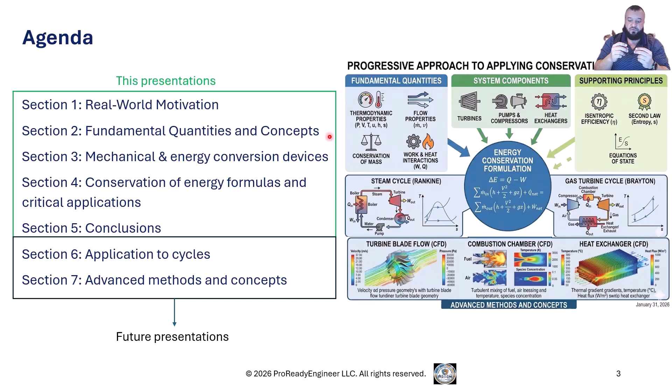So what is it that we are going to be discussing today? Let's grab a pointer. The way we are going to do this is we'll start with what you know, and what motivates us. Why would we want to study the conservation of energy? We move on to bolts and nuts. Any topic you break down to the bolts and nuts, you see, how many human beings, if you give them a bolt and a nut, wouldn't be able to spin the nut on the bolt? I think very few.

So if you start from the bolts and the nuts and you assemble all the way up, by the time you reach this big assembly, it's common sense. It's simple, easy to understand and comprehend. So that's exactly the flow. We'll start with some fundamental quantities, properties, things of this nature. Then we move to introduce mechanical devices that are used for energy conversion. And we are building toward this section 4. Section 4 is typically where you start learning this topic in regular teaching styles.

I don't believe it's an effective way. I think this way is truly very effective, that I am teaching you about the topic. So by the time we write down the formulas, it will feel to you as if these formulas are something you've known forever. They are very easy, very simple to write down. Then we will give some conclusions.

And as I always say, I'm going to take you from zero to hero, from the very first principles of how we think about conservation of energy. And down here, I'm going to take you to CFD analysis, what kind of different CFD exists, why we use them, how we use them, what's the value, what's the assumptions. I cannot do all that; I need many hours. So what I'll do is I'll cover this today, and then we'll go to the next level in either one or two videos that will come really soon, if you will.

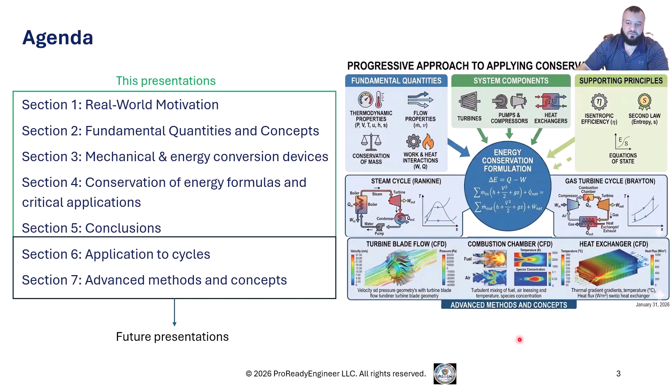To set you up for success, you see, conservation of energy is a concept that you come across in your day-to-day life, and you either notice that or you don't know that. So let me tell you. See the fan that sits on your desk. What is this fan doing when you turn it on? What exactly happens? You say, it blows air on me. That is conservation of energy. How is that? Well, you see that rotating element that rotates. It took this rotating mechanical motion and transferred it to fluid motion.

Your water heater. What does your water heater do? Burns natural gas. You know there's a natural gas connection. Many of you went probably in your basement. You've seen the little flames there. And it takes this natural gas and takes that energy and heats up your water. That's conservation of energy. Your air condition, your fridge, your car engine. Car engine, you put fuel and you get your wheels rotating and you travel. Mechanical motion from fuel energy, conservation of energy.

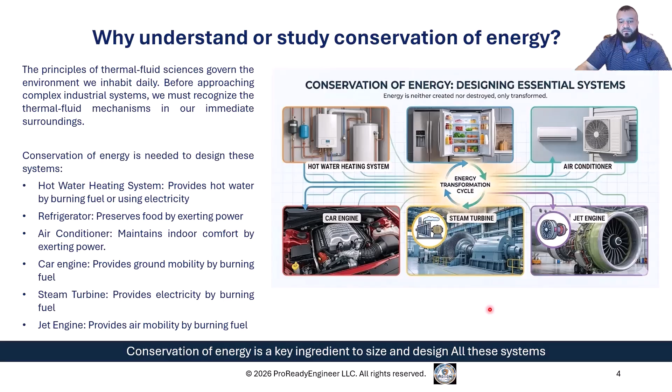The jet engine, when you fly, that device on the wing that powers the plane. Principle of conservation of energy. Steam turbines that generate electricity. If you've never heard about them, these are very important units that generate electricity. We're going to talk about them in this presentation. And on and on and on. So either you notice that this conservation of energy, where the energy is changing from one form to the other, or where it's changing from something to something else to function in a certain way, to deliver a target. This is all governed by the conservation of energy. So it's a key ingredient. We need to know it well.

We are going to get on it, starting by the very basic bolts and nuts. We're going to talk a little bit about conservation, concept, properties, heat transfer, fluid flow, work, closed and open systems. So let's do that. In every section, I'm going to follow the same strategy, if you will. I give you the name of the section and the ingredients or the components of that section, if you will.

I'm going to strongly advise you to go back to my video about properties. Watch it first. I have like a slide here, but I think the video is like an hour and a half or something, talking about the properties, how to feel them, how to measure them. I got a tremendous amount of positive feedback from people who have seen the video, so thank you for that. Always remember when you watch my materials that I am actually following a sequence. It's not haphazard. I publish something and I build on that and I kind of keep doing that.

So very quickly, a refresher about thermodynamic and flow properties. U is internal energy. Think of it as the energy of the molecules. It's something that's a very strong function of the temperature.

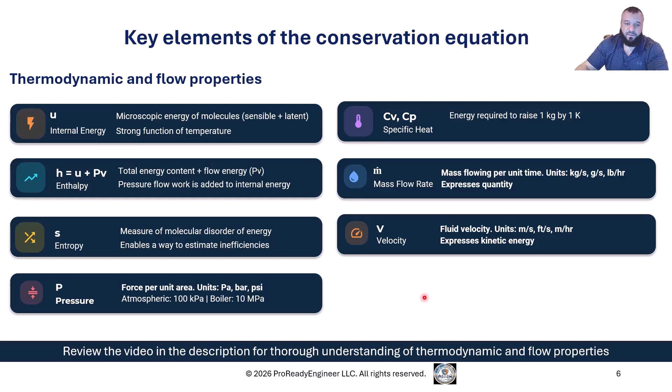Pressure, force per unit area. CV and CP, specific heat: the energy required to increase the temperature by 1 degree. Mass flow rate, the amount of mass flowing per unit time of the fluid you are working with, and v is the velocity. I'm going to put the link in the description for you to learn more about these properties. In the other video, I discussed these concepts on the screen, so let's get on it.

Before I talk to you about conservation of energy, if I'm going to teach you about conserving something, you better know first what is the something. Enthalpy is one of that something. It's the energy of the flowing fluid. We discussed that. Now add to it potential energy. Potential energy, you've taken it in your high school courses, where they told you MGH, right? There's a datum, you go from the datum. They told you when you are standing there, the potential energy you have is MGH.

So where is the mass here? Why didn't you put mass, M or M dot or mass flow, something of this nature? Because this is just a specific energy form. What do you mean specific energy? Well, that's in joule per kilogram, energy per unit mass. We many times like and use both flavors. The flavor where we say, here is the energy per unit mass. And then when you say, no, here's actually the total energy, you multiply that by the mass. So the units of that is joule per kilogram, kilojoule per kilogram, BTU per pound, energy per unit mass, and this reduces to feet squared per second squared, meter squared per second squared, and on and on.

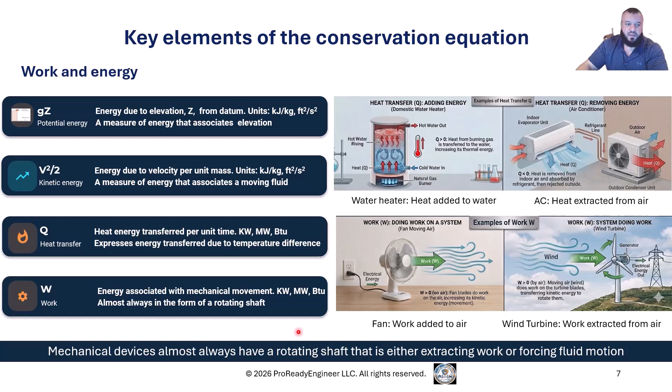We discussed open system versus a closed system. To the most part, everything is an open system. Whenever I say something and I say, well, this is what it is, this is what it means, the 90% of life is what it means, just so you now know more about me. Open systems, what do you mean by open system? Very simple. What is a system? A system is that thing you are interested in, you are solving. If we are analyzing your fan, then your fan is our system. That's it. If we are analyzing your water pump, that's our system. A turbine, that is our system. Your boiler, it's our system.

That's a system. Open system means there's a mass flowing in and a mass flowing out, or just in or out. There is mass flow. That's an open system. So when I say that, the first thing that comes to your mind, well, almost everything is, very few applications are where no mass goes in and out. So then we shouldn't have closed systems? No, there are closed systems. What happens in a closed system is there's no mass transfer. Mass doesn't come in, mass doesn't go out.

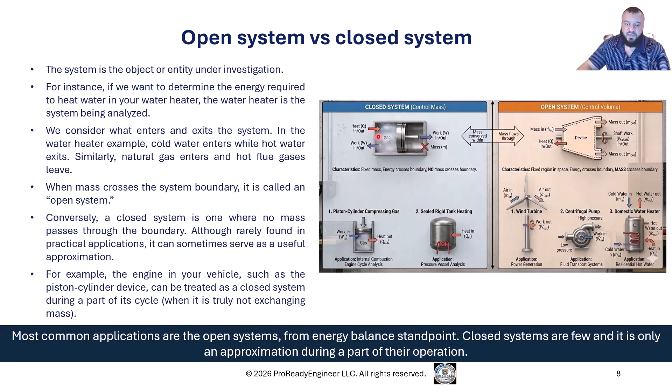Why are we dividing the systems into open and closed? Because our analysis will be a little bit different, by the way. That's it, that's all, just a little bit different. Good. And I have some depictions here. Open system, open system, open system, stuff coming in and out. And a cylinder here with no mass transfer is a closed system. Good.

So what is conservation? Conservation is a common sense principle. All engineering, remember, engineering is an applied science. It's using science to do things that are useful to our lives. This is engineering. And it all makes perfect sense. Engineers, in my opinion, I would recommend every single human being on earth to study engineering. One way or the other, even just a portion of engineering, even if you get another degree, even if you are a medical doctor. Engineering is amazing in making your thinking structured and geared toward targets and efficiency and economy. It makes you think of multiple things at the same time, very well organized at what you do, and it benefits all aspects of your life.

Conservation is a concept that you know by heart. You say, earlier in the week, I had $1,000. And now it's Sunday, and I have 350. So what happened? Well, I spent 650. There's nothing else to say. Likewise, when we do the conservation of mass, and energy will follow, the mass going into a system is the mass coming out plus the mass that was stored. No one can object to this equation. And you can never forget it. Like I tell it to you now, and until the day you die, you cannot forget it. Because how would you forget it? God forbid you lose your brain or something. What comes in has to be what comes out, plus what was stored.

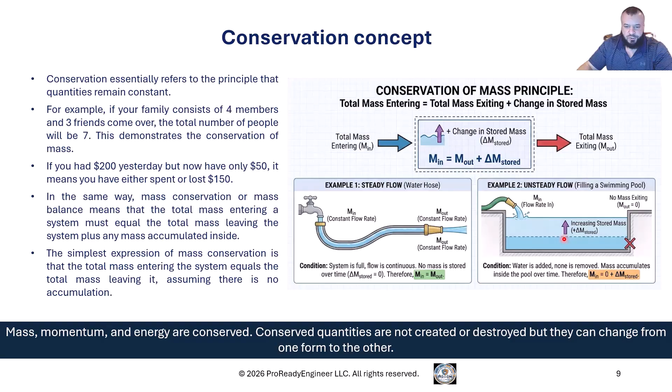Now, if we talk about filling your pool, that's a little bit different. Your system in this case, what you are analyzing, what you are designing, is your pool. You are filling it. That's my pool, that's my system. Okay, what's happening to your system? You say, mass is coming in, your hose is on, you're filling it. No mass out, and the mass is all stored. The mass in is what is stored in the system. So you cannot go to analyze this and say, well, there's no stored mass. The whole thing is stored mass. Good. So conservation is actually very simple.

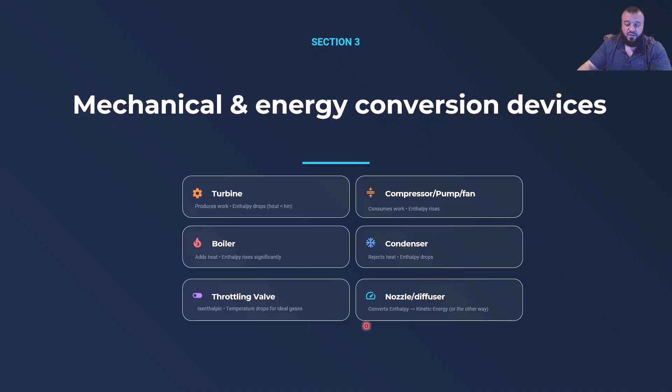So now let's move on. Before talking to you about conservation of energy, I've given you all the bolts and nuts we need for now. I'm going to introduce you to mechanical devices. We need that before we move forward. What are the mechanical and energy conversion devices I want to share with you about? We have the turbines family. We have the compressors, pumps, and fan family. We have the boilers, heaters family. We have the condensers, radiators family. We have the throttling valves. We have the nozzles and diffusers. These are devices that exist in everything around you. Let's see what they are and what they do.

Turbines. These are mechanical devices that harness energy from energized fluids. If you have a fluid that has energy, you put in a turbine and you extract that energy. What do you mean, extract the energy? You put in that turbine and you get that spinning shaft we are talking about. Once you have a spinning shaft, the turbine is spinning that shaft for you. You can do a tremendous thing with this.

You have seen water turbines before. I've seen a lot of ads on Facebook and YouTube of units being sold now. They go to a river, they have this set of blades, they put it in the river and the river is flowing, so it's spinning. It's connected to a little generator, and then they have generated power. It's a water turbine, but a micro turbine, a very small turbine. But that's the whole concept of turbines. It takes the energy of the flowing river, which by itself is not very useful to you, and suddenly makes it something very useful: that spinning shaft connected to a generator in this case.

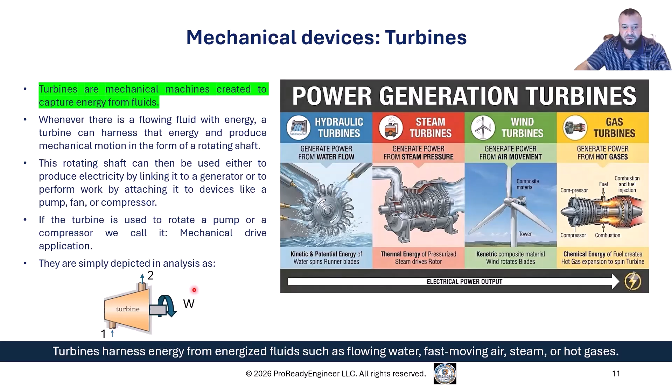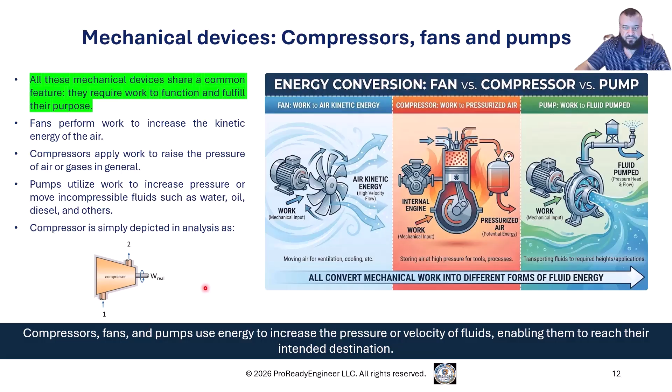And in the turbomachinery material that I will present, I may touch a little bit on the different types of hydraulic turbines, Pelton wheels, Francis, Kaplan, and then you'll know a little bit more about that concept of specific speed and things of this nature. Good. Little bit more on the devices.

So boilers or heaters, what they do, there's no work. In your basement with your boiler, no shaft spinning, none of that. You burn fuel, you heat the water up. That's it, Q. It's just Q. Take the energy of the fuel, change it to a thermal energy. We heat something up.

Condenser and radiator is the opposite of that. It's when you want to remove heat, right? Think about your AC. It's removing heat from your home, then a condenser is involved. There's some sort of heat exchanger that cools things down. Well, it's more called an evaporator, but that's beyond what I want to say today. But it's that device that is pulling air from your home, moving a Q.

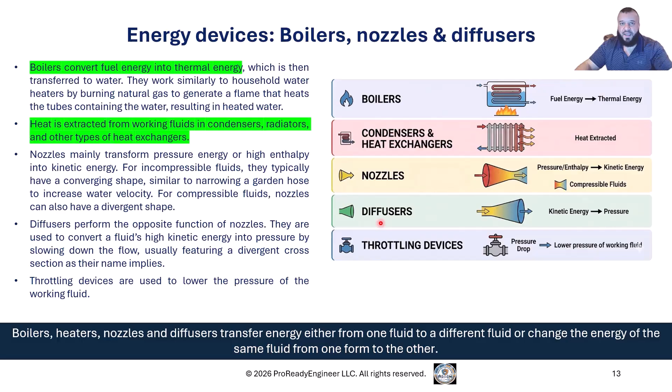And the way you will know it's changing to pressure or enthalpy is when we write down the energy formulation. So bear with me for a second. But what you know right now is the nozzle brings the velocity up, diffuser brings the velocity down. And in a second it will make sense to you why, when this happens, the opposite happens to your pressure or enthalpy. Good.

Now we are ready to write down the energy equation in a simple form. And once we put the simple form, immediately we put it to application on a very simple example. Then we top it up a notch and we go to detailed system level analysis with the energy conservation. And then we top it up a notch to advanced analysis that you will actually see and use in the industry. And you will get subjected to some of that in your early career as an engineering student. Good.

Now writing down the energy equation is going to be very simple. If I ask you, after what we have done so far for 1 hour, when a fluid is moving, what are the energies associated with that moving fluid? You will say there are three things: enthalpy, kinetic energy, potential energy. If a fluid is moving and I want to quantify everything it has, nothing else it can have, it will be enthalpy, kinetic energy, potential energy. h, V squared over 2, gz. Where is the mass? Where is the m dot? Why aren't you multiplying? That's the specific energy form. Kilojoule per kilogram for each. That's it. Nothing else to put in. That's all the forms of energy that we can put in.

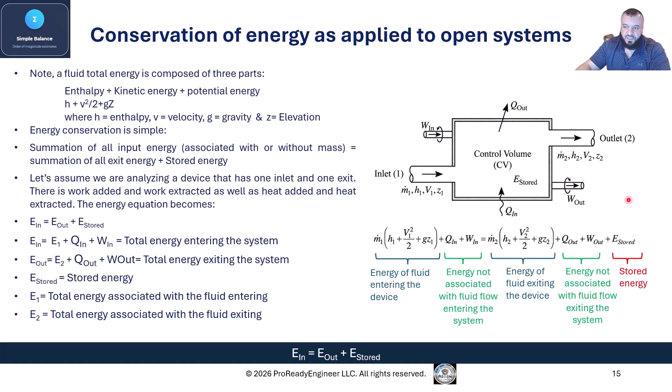And immediately we put this to work, meaning we use it. Let's go and see how this will relate to what you learned on the first law of thermodynamics. So it turns out that the first law of thermodynamics is a simplified form of the energy equation that we've written. How is that? Let me show you.

Assume it's steady state. There's no stored energy. Assume no work is coming in. Assume no Q is coming out. Assume that the potential energy change is about 0. There's not much difference in the potential energy, and there's not much difference in the kinetic energy. All these terms can disappear from the equation on the previous page. Plug everything in. You end up with Q minus work equals m dot times delta H, H2 minus H1.

And this is the formula right there. Q minus work equals delta H. That's the first law of thermodynamics. Does it make sense? For now, I think it makes tremendous amount of sense for you. The reason there's a difference between Q and work is actually manifested in the difference in the enthalpy. That's it.

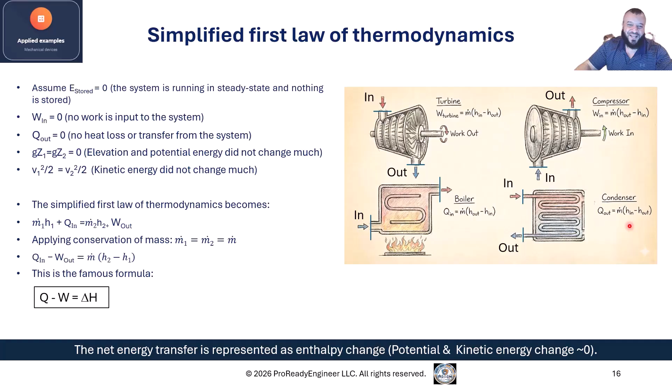Draw the schematic and say: here's the flow coming in, here's the flow coming out. Put everything together and solve. If the work is positive, your assumption is right - the device is using work. But if your assumption is wrong, the sign will be negative. When you finish your math, it says negative 100 kilowatts, that means it's actually generating work. Very highly unlikely you'll get that to analyze, but just in case. So it's very simple, very simple.

Now let's move to the pumps. Why treat the pump differently? Well, you'll know in a second that the fact that it is incompressible gives us a simplification to the example, and it'll make things a little bit different in a good way.

So this is a pump. The pump needs work. There's something coming in - this is water coming in, and there's water coming out. When the water comes in with a certain m dot, it has h, it has velocity, it has kinetic energy and potential energy. We killed that.

M dot, h, v, z2. Let's write down the energy equation, the generic one. There's no Q out, there's no Q in, there's no work out, it's only work in. Furthermore, we can neglect the potential energy, we can neglect the velocity difference, assuming that V1 and V2 are the same. That's an assumption - it may not be, by the way, it may not be.

The potential energy difference makes perfect sense to ignore for the pump. You know this pump, if I have it here on the table, like this big, a very large pump, and you look at the difference between the immediate inlet to the pump and the immediate exit of the pump - you say, well, these are very close. I mean, potential energy of what? Compared to this order of magnitude, this thing is moving a tremendous amount of energy, so many horsepower. It's like saying you have $10 million and 2.5 cents - that doesn't make any sense. You don't do that. You have that feel for the money; please use the same feel for the energy. You say it just doesn't make sense, don't even talk about it. Good. So potential goes away.

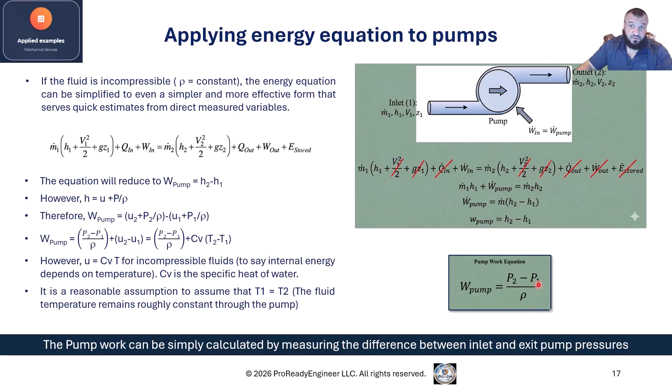Enthalpy is not easily measured. It's not easy. It's not a direct measurement. You cannot do that. You cannot measure enthalpy online. So that's the goodness of making this simplification for the pump. It's something that we very easily measure accurately. Good.

Now, we are going to talk about applying the conservation of energy to a closed system. Very quickly, just one slide. Now, it's not going to be any different from what we said. Energy 1 equals energy 2 plus energy stored. Energy at state 1 is equal to the energy at state 2 plus what was stored in between. Put the terms. Now take a close look.

I'm not using m dot. I'm not using mass flow rate. There is no mass flow rate. It's just mass. It's not changing, not coming in, it's not coming out. And when I express the energy of the fluid, I'm not using H anymore. Why? There's no flow. You don't use H, you use U. Internal energy, a fraction of that is what you use.

Put it in. Q and work don't change. Here's the assumption of what's coming in and what's coming out. Do the magic like we've done before, same exact. Q minus work equals delta U. So instead of saying Q minus work is delta H for an open system, it's delta U for a closed system. All of it in one statement. You use U instead of H to analyze a closed system. Good.

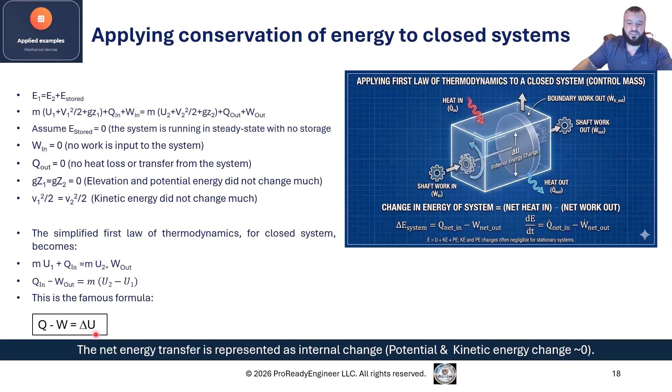I want to level up to some detailed analysis now, where we are incorporating losses. I want to teach you all about that. So imagine you have that pipe running from the pumping station by the river to your home. Many miles of pipe, or you are pumping crude oil from where it's extracted to a refinery somewhere, or you are pumping natural gas in a line that is running many miles. There is something important you need to know called frictional losses. Frictional losses are the losses because of friction at the wall of the pipe.

Now that pipe, it's made of, let's say, cast iron. Let's say it's made of steel. Let's say it's made of stainless steel. Let's say it's made of some sort of plastic. Let's say it's made of glass. Not that one, but this glass is what we use in a lab for visualization and stuff like that. But what I'm trying to say is, as the fluid is running in there, it interacts with the surface. When it interacts with the surface, this friction will reduce the enthalpy or reduce the pressure.

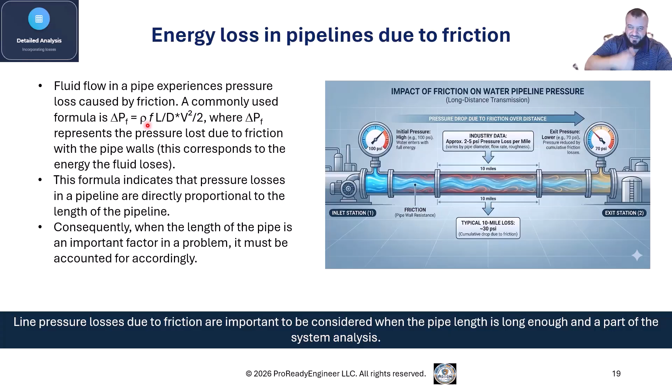Now the straw. What will happen if you try to put a small straw? You're going to keep sucking and you won't even be able to. Because of the frictional losses, the viscosity is extremely high, everything is sort of messed up, right? How can you put enough effort to overcome all this and be able to pull through? So the straw is very large, just like a finger, a finger large, and that makes it work. Now you can suck and pull that chocolate cake. Good.

Let's top it a notch. We are in the detailed analysis here. We're going to top it a notch. I'm giving you a system on the screen. Let's start with that. What is this system? It's a typical depiction of how pumping systems work. There's a pump sitting on the ground. That's our datum here. The word datum immediately tells you that we're going to be using potential energy, because datum, then potential energy relates to that datum.

So here's a datum. There's a tube sucking, like your straw. This is your straw. Sucking the fluid, in this case, let's say it's water, from down here where the water is. And let's say this is your skyscraper that you live in, very long, and the reason we have the pump is to suck that water from there and pump it all the way up. Let's say very long skyscraper. To a tank sitting on the roof. And then this tank sitting on the roof, so water comes out, dumps in the tank, fills that tank. Then that tank feeds the whole skyscraper. Tremendous amount of water. Let's say it's a very large one, 200 gallons a minute. Something really large.

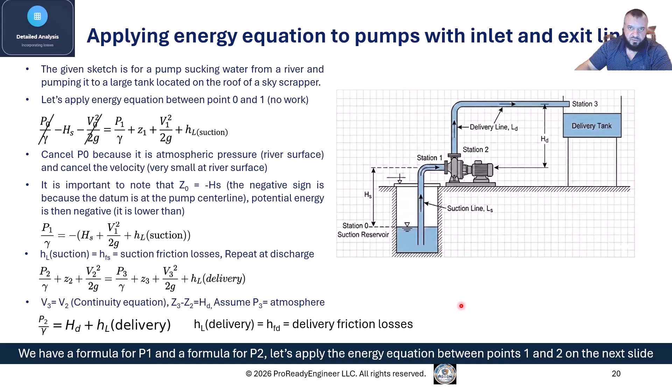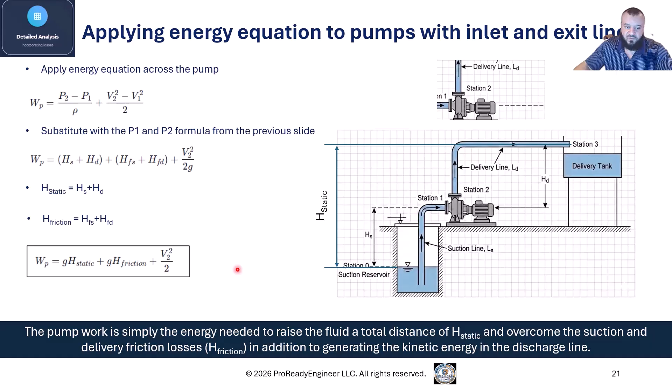And let's assume, as we have done a second ago, there's no power extraction, power addition, heat generation, none of that. Write down the energy equation now. And assume that this is incompressible. You remember what happens if we assume incompressible? You say H plus V1 squared over 2 plus GZ is equal to H, but H is U plus P over rho, but U is CV times T, but temperature didn't change, take that out. Now with pressure I can write it down instead of enthalpy as pressure. You arrive down here.

Bernoulli equation is where you make all those assumptions I said to write it down this way. Instead of saying enthalpy, that kinetic energy plus potential energy is constant, this just means they are constant. Energy has to be constant. Where does it go? Instead of saying enthalpy, you use pressure. Why? Because this is incompressible, so you can use pressure instead of enthalpy. And you say the sum of 3 is constant.

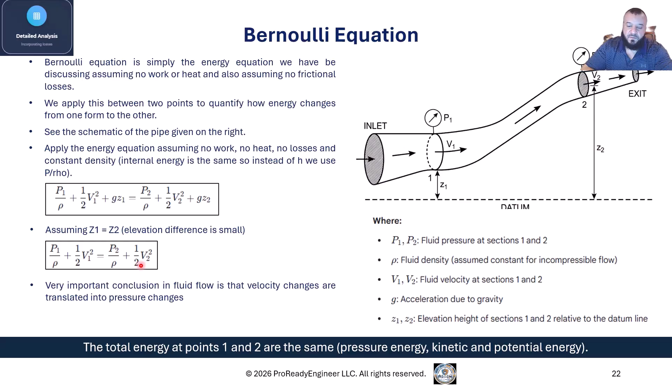You are an engineer. Engineers do order of magnitude analysis. They know what to include and what not to include. Very good. Let's step it up a notch.

And now we're going to go to advanced analysis, even a little bit more advanced. Some supplementary materials here are good for you to review, so please watch my combustion introduction video. This is my deep expertise. I love that science. And watch a couple other videos about properties. You may need that to understand what I'm going to explain here.

Now, let's say I'm going to take that element from the combustion system. Please watch the video called the premixer. It looks complex, but all it is is air flowing through it. It has passages, and there is a reason for that, see my video. So here's the experiment I'm going to do. I'm going to take that device and put it in a chamber, literally a chamber. This chamber has air coming through it, and this air is metered. Metered means I'm measuring the mass flow rate. I know the mass flow rate accurately. M dot.

Air goes in, it fills this plenum at a pressure P1, and it flows through and dumps into another plenum at a pressure P2. I have another plenum sitting at the exit of this element, and air is just going there. You turn it on and air comes and dumps out. What are you measuring on this test? I'm measuring m dot, P1, P2, and temperature. Good.

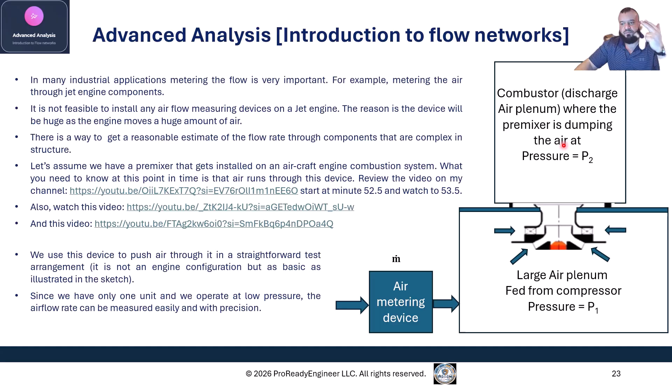Let's write it down. Applying the energy equation between point 1 and 2: P1 over rho plus V1 squared over 2 equals P2 over rho plus V2 squared over 2. V1 is about 0. We've discussed that trick before: when the room you are sucking from is a large plenum, there is velocity, but it's low enough to just ignore. So I can take this out, and V2 has a formula that looks like this. This is the formula of V2.

The density I'm using in this case is density 2. If the density is not changing, like rho 1 equals rho 2, like you're running water, just use rho. Don't worry about 2 or 1. If it is air, which is compressible, truly rho 1 is not the same as rho 2.

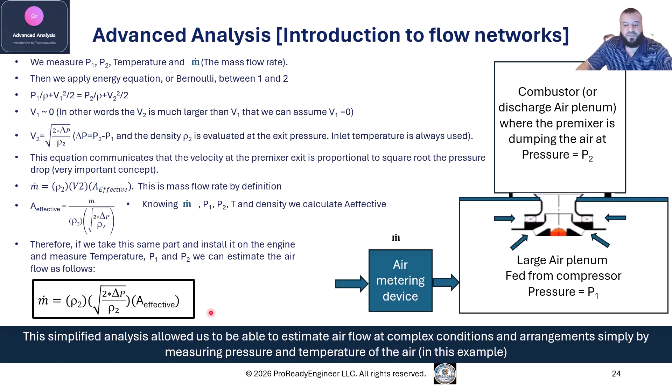The area effective concept is a concept that allows you to measure mass flow indirectly by just measuring the pressure. Very powerful, extremely powerful. Just think about that for a second. But there is actually an even more important reason we do that. It's not only to meter the flow, it's to know how the flow is split.

Now let me say again. Imagine this is a combustor on a jet engine, and we have many of these small units, and another unit called the heat shield, and another unit called the liner, and another unit called the nugget, and another unit called the first stage nozzle, and quite a bit of stuff. And I want to know the air that is coming from the turbomachinery, from the compressor, the overall air coming in. I want to know how it splits. There is 30% there, 35% here, 30% there, right?

How do you know that? That same exercise I told you. You take every component, and instead of it, you have an area effective, and you have pressure nodes. You know, pressure nodes mean what's feeding it, where it dumps, what's feeding it, where it dumps, what's coming in, where it dumps. And you make a network. Like here, you can use this commercial software, Pipe Flow Expert.

And you can do that for even a piping system. Let's say you have a tank, there are 3 pipes running, and then they divide into 4, and there are valves sitting on the way, and I want to know how much water is going to this line, how much water is going there, how much water is going here. If you want to split, they call them flow networks. You go to a software like this, you feed it the effective areas that you measured, you feed it the pressure points, you hit solve, voila, it tells you there's 30% here, 35 here, 20% here, 10 here, and 5 there, and you are done. You got your flow splits.

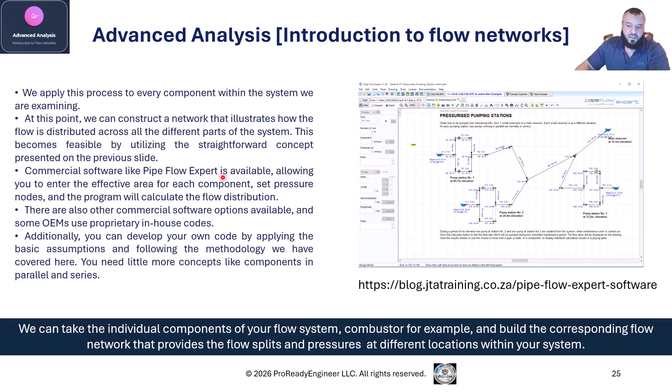Excellent. Good. And we are done. And we can conclude. It's been a great presentation. Boy, it's going to 2 hours now.

Very simple. Conservation of energy. Energy that comes in is equal to energy that comes out plus energy stored. Remember that energy takes three forms. If it's with the moving fluid, it's enthalpy, it's velocity, it's potential energy. There's Q and work. Remember your devices. Turbines, they generate work, it comes out. Compressors, pumps, fans, they take work.

Boilers, heaters, they take Q. Condensers, radiators, they lose Q. Diffusers and nozzles, they exchange velocity to pressure and pressure to velocity, enthalpy to velocity, velocity to enthalpy. And we looked at applications, how to write it down for a pump, how to relate it to the pump system configuration. Don't forget about the losses that happen in long pipes. When the pipe is not long, when you are right at the inlet of the pump, you tend to say this is of no significance.

Potential energy, when you take it out, when you keep it, velocity changes. We've known how to extract from this general equation the Bernoulli equation, a simplified form. The Bernoulli equation was tremendous in helping us understand the concept of velocity changing to pressure, pressure changing to velocity. We discussed some advanced concepts of how to take a complex shaped geometry and express it in an effective area, right? We discussed the flow networks and how this is used to split the flow on a structure.